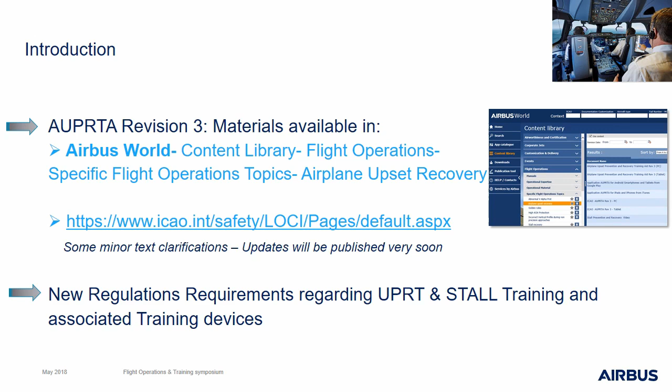What is the Airbus answer to all these things that we have in the regulation? First it was to introduce prevention of an upset, so that pilots can recover from this situation even if they are startled, and redefine what is an aircraft undesired state towards a stall. We were complying with this basically just by having this revision 3 document, but we said this is not enough. So let me come back and refresh our mind.

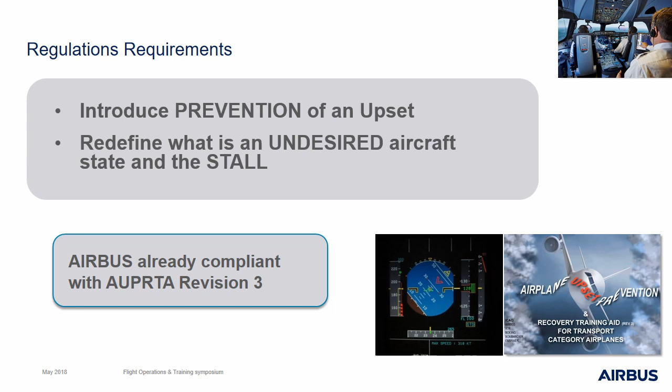What is an undesired aircraft state? As you know, it's not based anymore on bank angle or pitch attitude and so on. It's really that the aircraft starts an unintentional divergence from parameters normally expected during the operation. This could be pitch and bank divergences, but also speed. You can have moments in your flight where the speed is decreasing without you ordering it. So this is basically an upset of the aircraft, an undesired aircraft state.

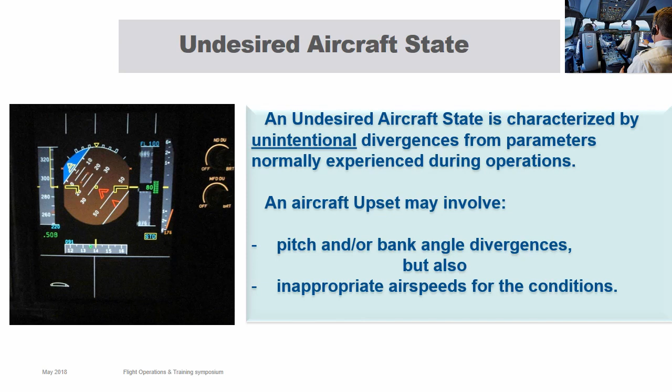The regulation now came out. We had regulation in the EASA and in the FAA. We did communication towards our customers. I will come back later on what we have done. And basically to the trainers, we had to explain as well why we need this new training, and we provide them with training recommendations, what is the best practice in order to complete this training on upset recovery.

On my slides, you will see two icons, sometimes one on the top right corner. One will be a cockpit, meaning this slide is dedicated to flight crew. And if you see a simulator, this means that this slide is dedicated to training devices.

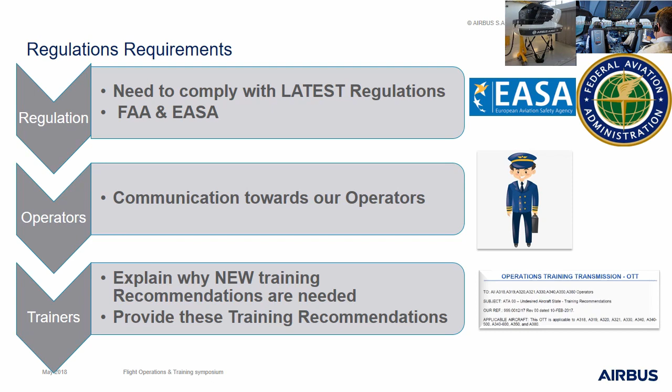Regulation-wise, we have EASA and FAA, and we have two parts. One part is for the aircrew, so for the pilots, and the other one is linked to the FSTDs, or the full flight simulators. In the FAA part, we have regulations in Part 121, and in EASA we have Part FCL, UPRT, and stall training. For the training devices, we have regulation in FAA called Part 60 with Change 2, where they impose more things that your simulator must be able to do. Very recently, EASA came out with a CS on FSTD, Issue 2 as well, with full capability of the stall training.

Based on all this information that we have reviewed, we have seen the need in Airbus that we have to issue a new data package, not only for the full flight simulator, but as well for the flight crews.

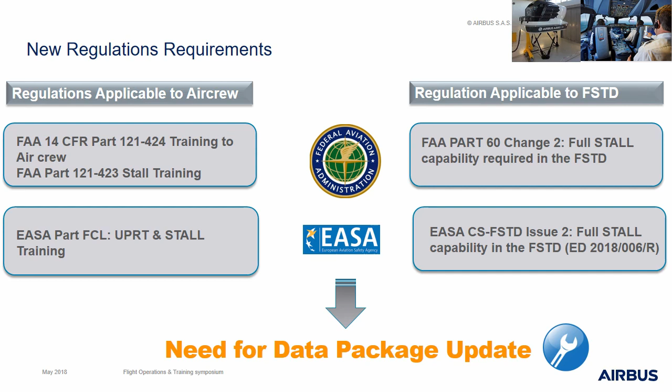For the full flight simulators, the FAA Part change 2, if you follow the FAA regulation, you have to comply with this. It requires that your FSTD must be able to do upset recovery training and stall training. The regulation has been published in March 2016. And if you do upset recovery training with your device, you have to do this before 12 March 2019. From that day on, all your training devices in which you perform upset recovery training or stall training must comply with FAA Part 60 Change 2.

On the EASA side, as well, we have an FSTD, CS-FSTD that came out, where full stall requirements must be available. But the regulation in Europe in EASA doesn't impose doing full stall training as compared to the FAA world. So it's up to the operator to decide to do full stall training. But EASA only said that you have to recover from the first indication of a stall. It has been published, the directive 2018-06, on the 3rd of May of this month. It's based on UPRT as well, stall training, and it's basically harmonized with the FAA. So we have two similar regulations now in the world.

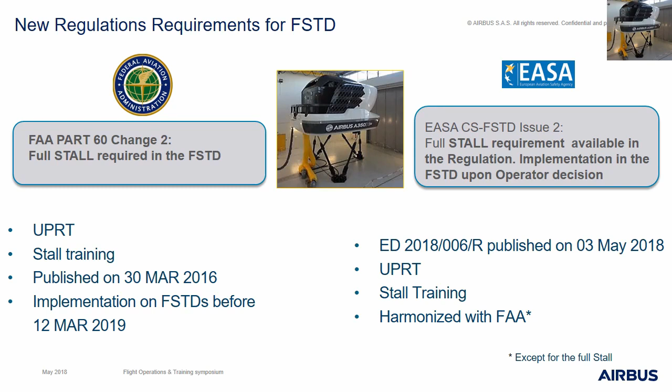And the Airbus answer for that is to have a fully compliant flight simulation training device. We introduce something new, what we call the automated stall entry function. I will come back later to this. This is something that we have developed, and we are sharing this with the simulator manufacturer in order to introduce

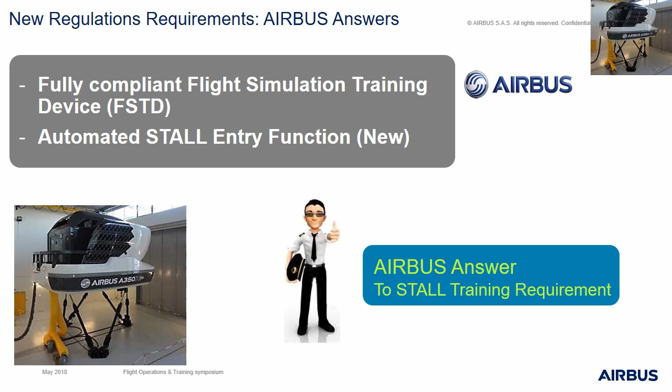On the FSTD and the automated stall entry, so what does Airbus deliver actually? We have a simulator data package that we provide to the simulator manufacturers. It's fully compliant with Part 60 Change 2. This means that you have a total free play capability, so you can enter a stall and fly the aircraft into the validated training envelope of the aircraft.

Remember that in a full flight simulator, you have different envelopes. You have the envelope where we went into flight test, which is completely validated. A little bit bigger envelope in which you can fly is the engineering data, so we extrapolate some of the data that we have encountered in flight test, but the aircraft can fly there. And then we have a validated training envelope.

This means that the simulator can fly within an envelope, and if you pass this envelope, the simulation will freeze. As an example, if we do stalls with an aircraft in flight test, depending on the configuration and so on, we go to 16, 17 degrees angle of attack. By engineering, we can say we can go up to 20, 21, but the full flight simulator can go up to 30 degrees angle of attack. But we don't know if it's really completely representative.

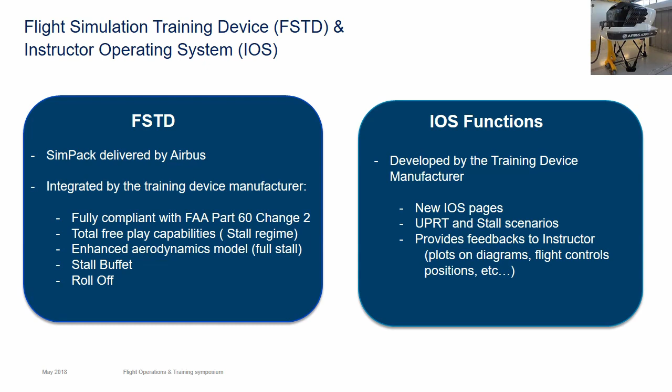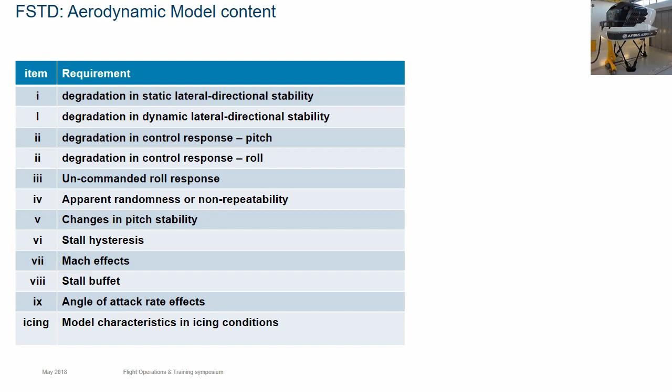To come to the aerodynamic model that you need to have for the complete stall and to be compliant with the regulation, FAA or EASA, these are all the points that you have. Basically, in the first model that we have provided, that our Department of Simulation Data is giving to your simulator manufacturer, we had all those points which were already in.

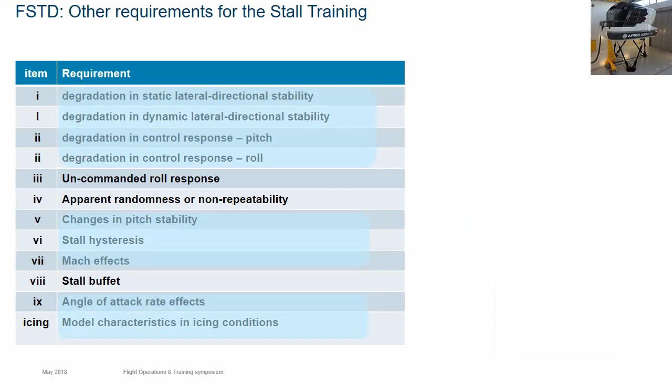Now, the points which were not in are the uncommanded roll response and apparent randomness or non-repeatability. This means that we have to introduce wing drops in the stalls and the stall buffet model. If you have all this in your model, you're fully compliant with the regulation.

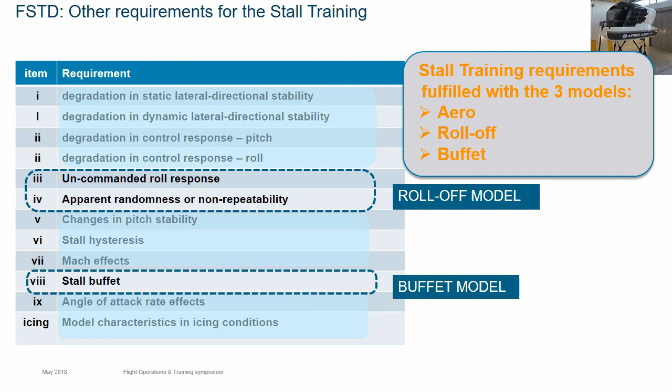To give you some more detail on the roll-off model: we went into our database of flight test and looked at the hundreds of stalls that has been done during the flight testing of an aircraft. We looked at how much time we had a wing drop, and we decided to recreate this roll-off model in our simulators.

First, we did it in our engineering simulator with the right computers, the PRIMs and the SECs that we have. And then we generated this model in the data package, and we tuned this in the full flight simulator.

We have seen sometimes in the world that some simulator manufacturers or providers of stall devices in the full flight simulator were really not realistic. You can ask even Wolfgang - basically most of the stalls that we have, our aircraft will remain wings level.

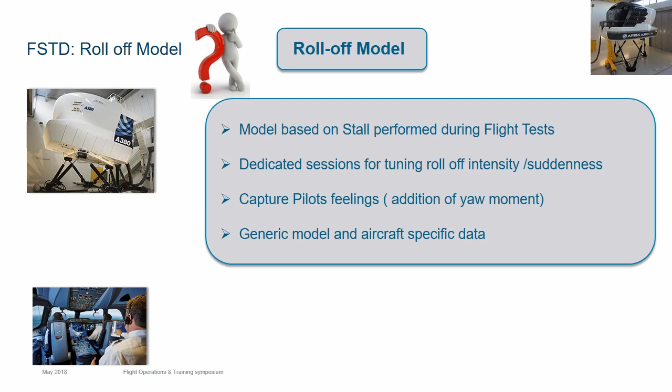We didn't want to introduce scary situations with very big wing drops in the training devices, so we wanted the exact reproduction of the aircraft. One of the key things we had to do during tuning in a full flight simulator is introduce a kind of yaw acceleration in the motion movement in order to correctly simulate the wing drop in the aircraft. So this has been done.

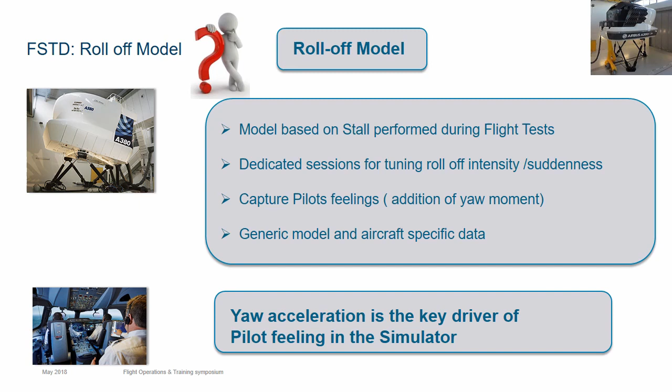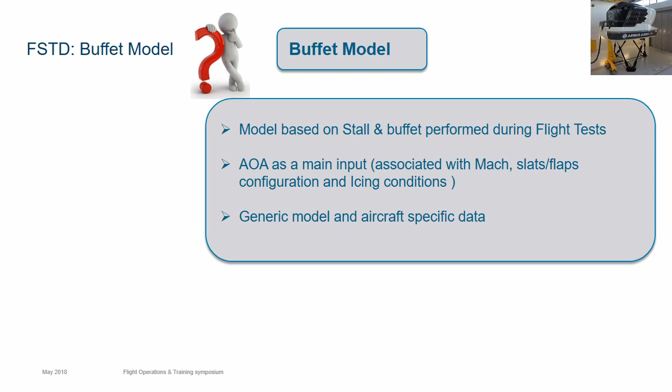For the buffet model, it's again based on stalls performed during flight test. The main driver to induce this buffet is the angle of attack. Of course, the buffet is also a function of the Mach effect, the configuration of the aircraft, and so on. This model gives a realistic input into the motion.

We had sometimes complaints that this kind of motion movement could damage some parts of the simulator. We have seen simulators where parts of the ceiling were coming down, but this is really the real buffet model.

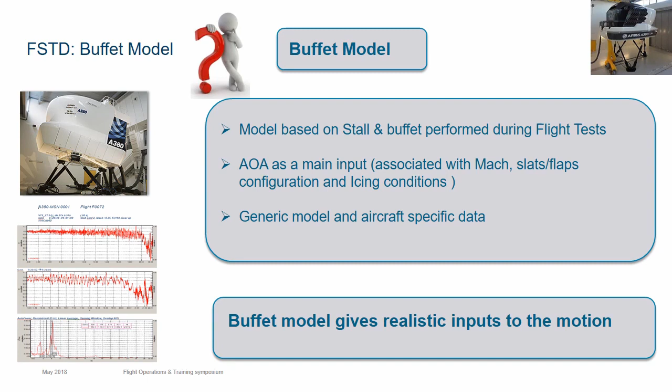What we did is shown in the different graphs here, where we have what we did in flight test shown by the magenta line, and the dotted magenta line gives the reproduction in the full flight simulator.

On the lower two parts, we worked on two important pieces of information as well for sensation in the pilot seat, which are the vertical vibration and the lateral vibrations. So we put accelerometers on the pilot seat in the full flight simulator, and we compared this because during stalls that we do in the aircraft, we have accelerometers on the pilot seat. We compared those two models.

We went to the simulator manufacturer in order to tune this and put it really into a data package. So with the fully validated data package that we provide, you have exactly the way the aircraft behaves, and you can show those symptoms to your trainees.

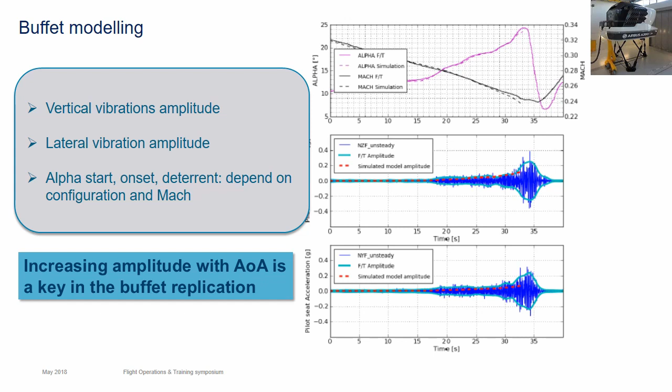This is for the aerodynamic model. For the functions for the instructor, we have sent a document to the simulator manufacturers, with recommendations for some pages in the instructor station, and some scenarios for upset recovery and stall scenario activation -- what I just said before, the automated stall entry.

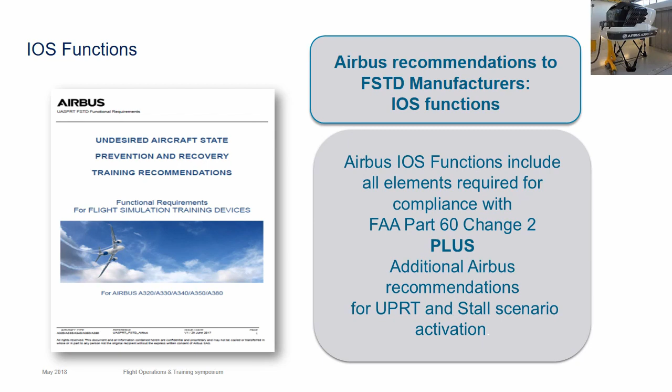This is typical for an A350 simulator that we have in Toulouse -- more of a prototype. One page you have to provide to the trainee is what we call the alpha-beta plot. This means the angle of attack and the side slip during an exercise, where you see the limits -- where you're going to have the stall warning, where you have the critical angle of attack, where you have the full stall situation -- so you really see how the aircraft behaves and how the recovery training has been done.

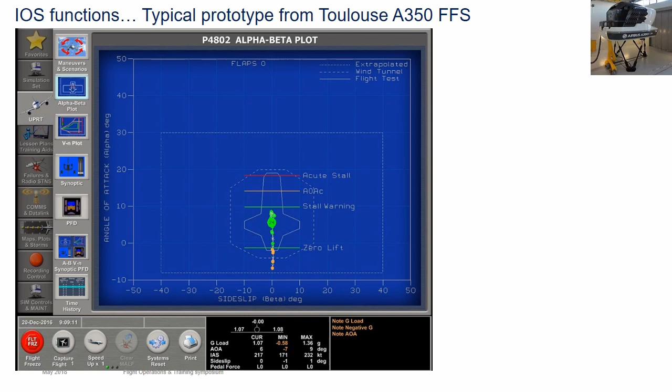The second page you must have in your simulator to correctly do upset recovery training is what we call the load factor and speed plot. This is the flight envelope of the aircraft, where you have 2.5 G positive and up to -1 G negative. You see how the trainee recovers. If you see him going all over the place on the page, this means the recovery technique was not correctly done, and you have to repeat this until he's proficient in the recovery of the aircraft.

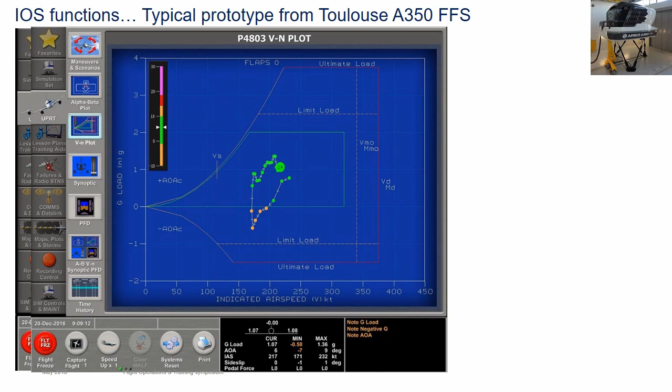A third page which is available is a kind of plot, second by second, where you see all the different parameters of the aircraft.

The fourth page we have is a summary of all the pages, where you have a picture of the primary flight display and the position of the flight controls during recovery. If you do recovery, it's not easy as an instructor to see what the pilot is doing with the side stick or with the rudders. So from that page, as instructor, you can clearly monitor how the recovery is done.

Of course, all of this can be recorded and replayed in the briefing station, or in real time if needed in the full flight simulator.

The last page we have is basically the maneuvers and the scenarios. We have two parts here. One is what we call maneuver-based training -- this means we will introduce the aircraft into an upset.

Could be nose high, nose low, high speed, low speed, with bank, without bank. The simulator will be frozen at that position. This is used basically to teach and to recognize upsets, so that everything is frozen and you explain to the trainee, or he has to discover in which state the aircraft is.

The issue with this kind of simulation is that at the moment you release the full flight, because the situation is frozen, the motion is not kicking in at the same moment. So if you do recovery from that position, the time that the motion is coming in could give negative reactions to the pilot, or do negative training. This is why we recommend for big upset recovery training to disconnect the motion, not to use the full flight motion.

The right-hand part of the screen, we have scenario-based training. This means that you can induce, without the pilot knowing it, so a startle effect, some changes in the aircraft behavior. You can do that with light, moderate, or severe effects.

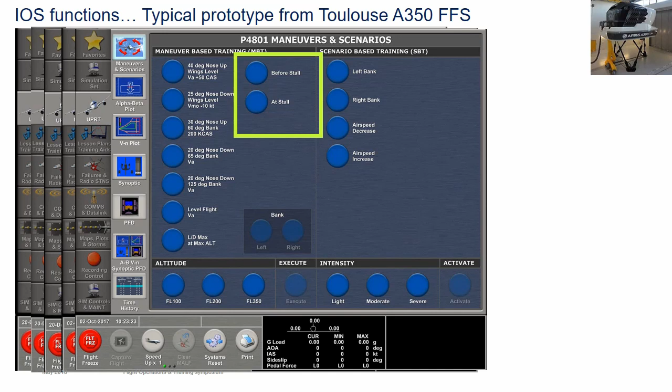Then in the middle we have introduced two new functions. They are called now before stall or at the stall - the name can change. This is basically to answer the requirements of the FAA on Part 121, which would require full stall training. This means the pilot has to go beyond the stall warning until the aircraft is stalled and recover from that position. Is this easy to do? Do you think? No, it's not easy to do.

First thing, do you know when the aircraft is really stalled when you're in a full flight simulator? Not easy to define. Even for us at flight test, when we do stall training and stalling of the aircraft, we have a flight test engineer in the back who is yelling to say that the aircraft is stalled, because we don't feel it in the cockpit. He can see on the instruments in the back when the lift is disappearing and there is a kind of G-break, what we call, that the aircraft is coming down, to say look, there the aircraft is stalled.

Full flight simulator, very difficult to discover. And the second part, which is quite important as well, we want pilots to recover at the first indication of the stall. First indication of the stall could be the stall warning, or buffet, or other symptoms, wing drop or non-responsive flight controls. We don't want pilots that when they are into the stall, the stall warning is yelling there in front - stall, stall, stall, cling, cling, cling - that you say to your trainee, continue to pull the side stick in order to go to this full stall.

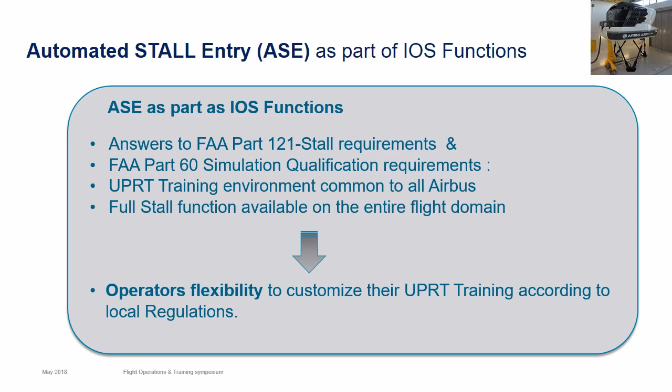This is why we came up with the idea of what we called the stall demonstrator. What is the stall demonstrator? We have two scenarios in there. The first one is a kind of what we call the stall demonstration.

This means hands off, you say to your trainees, imagine that somebody else is flying the aircraft, or you sit in front, and the aircraft will decelerate towards the stall. When the aircraft reaches the stall, the angle of attack stall, the aircraft will stay at that position, the motion will not freeze, and the aircraft will continue to fly at the stall position.

So this really is a device for teaching. At that point, you can say to your trainees, look, this is the pitch of the aircraft, this is the angle of attack - if you use the bird, the pitch minus the FPA gives you the angle of attack. Look what the vertical speed is doing. Feel the buffet that you have at that time in your seat. Try to remember this. Have your memories wakened up to remember those phenomena.

And when you're at that position, at any time you can say to the trainee, recover. This means the motion is alive in this position because it simulates the buffet. At the moment the pilot touches the side stick, he can do a full recovery from a stall situation. So this was our way to answer the FAA.

The FAA have given us feedback on that, and they said it's a very good starting point to do full stall training. In the future, we will still have discussion with the FAA in order to have this fully approved, or put somewhere in a document that this is really what they have to do. So this is the first part.

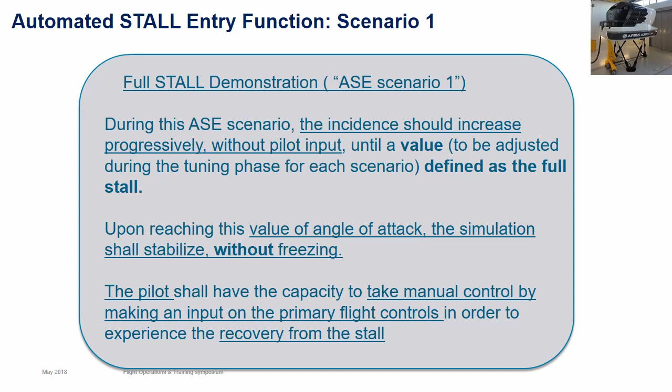The second part that we have is what we call the full stall exercise. This means that there as well you can stall the aircraft and introduce wing drops and so on. The idea in this exercise is that, imagine the other pilot is flying, the aircraft starts to decelerate, you're pilot monitoring, and as soon as you start feeling the buffet, you have to recover from that situation.

We have done this in such a way that we went up to the stall angle of attack plus a few degrees. So if it's stalling at 6 degrees, imagine we went up in the simulation to 9 degrees. If you reach 9 degrees, the simulation will stop. This means you went too far and missed a lot of cues in recovering from that situation.

You can do the same by introducing wing drops, so roll-off models during this training, and you can see if the pilot has the good competencies to recover from this stall situation, which is what? First, reduce the angle of attack, so push on the side stick or release the side stick.

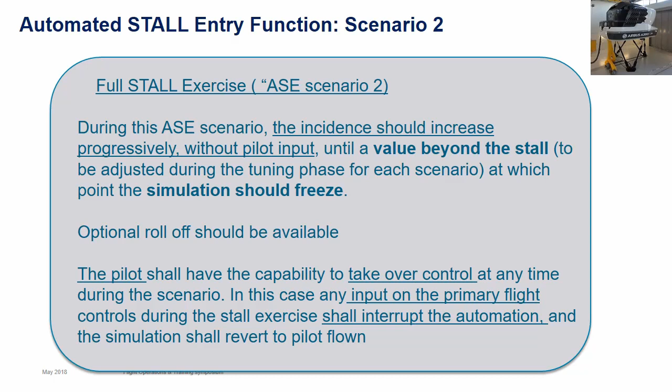So in a nutshell, to summarize, if we look at the stall, we have two positions. Either we stay and simulate the stall at the stall angle of attack by keeping the motion on, or we go to a point a little further where you have to recover.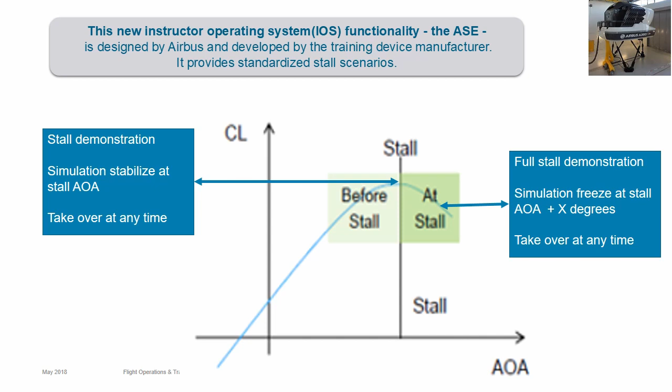So this data package is available from some simulator manufacturers, and we continue to validate this, because in order to have this, we have to provide you with a statement of compliance. Either you do it yourself or other people can do it. What is the statement of compliance for FAA Part 60 Change 2 or EASA?

You need the three models: the aerodynamic one, the roll-off, and the buffet. You have to be compliant with the QTGs, Qualification Test Guides. You have to have the correct simulated envelopes. And it's stated in the document that the statement of compliance includes a final subject matter expert assessment.

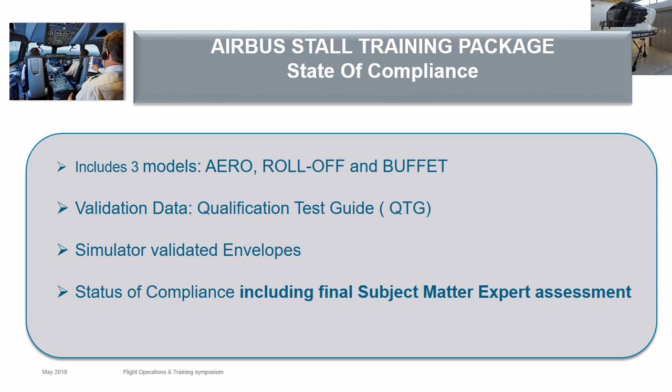We went into the regulation to see what defines a subject matter expert in stall. Everybody can say I'm a subject matter expert in that. What does the regulation say about the subject matter expert? The friend of Dominique Himeta, Chuck Yeager.

The guy has to be type-rated and qualified in the aeroplane that is simulated. So you cannot ask a guy from company B to validate the stall of company A's aircraft. Second, he must have direct experience in conducting stall maneuvers. So you don't find this person at every corner of a street.

The subject matter expert can have credit for different aircraft models. This means if you're familiar, within the Airbus family, with stalling of the A330 and you want to do the A340, you can have credit for that. And the subject matter expert must be familiar with the stall training maneuvers that will be done later on in the FSTDs. So the person who validates your stall model in the simulator must have real knowledge of stalling in order to give a statement that what is simulated is realistic, basically the aircraft.

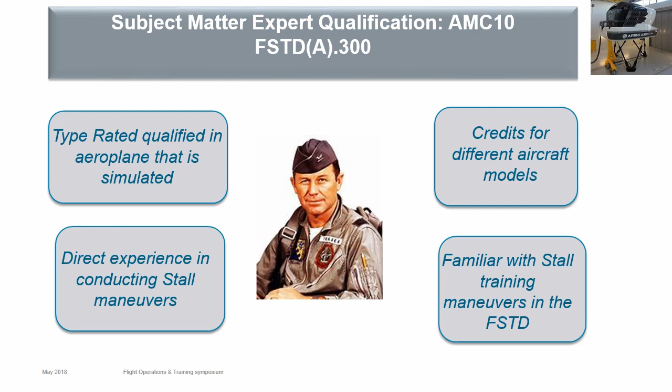Do we have those models in our data package? Yes. So for the A320 family, I have the standards there. The 2.0 is fully compliant. We have for the A330 CEO the standard 2.6.

The A330 NEO, since we are still stalling the aircraft and doing some testing with it, this will come later in the standard data package. We have it for the A350. And for the A380, we don't have a full data package, but we have an add-on to the actual data package in order to have the compliance matrix with the regulation.

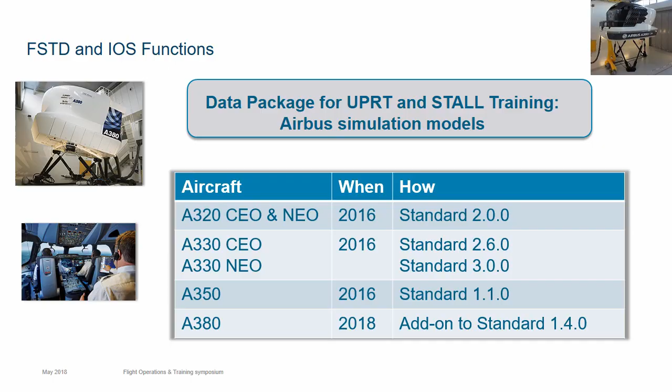So to summarize what we have for flight crew training: you have the Upset Recovery Training, revision 3. You have a lot of information on stall and upset in the FCTM. You have the stall training video, which is also available on the application that Maxime showed you. And you have documents from EASA, FAA, ICAO, IATA, and so on.

And of course, in our training organization, the ATO, Matthias will explain what kind of training program we have in order to fulfill the stall requirement from the regulation.

And of course in our simulator we have the full stall data package. You have the functions on the instructor station to complete this training, and the automated stall entry to demonstrate to your trainees the correct behavior of the aircraft during the stall.

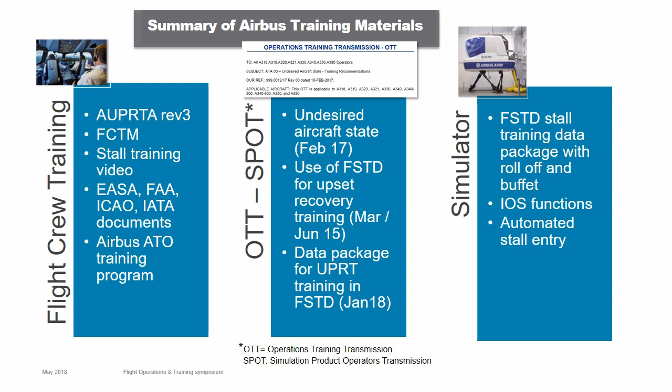Now I will let Matthias conclude with the training material and the training that we provide in our training organization.

Thanks, Gwyneth. Thanks, Xavier. Good afternoon, everyone. It's my pleasure to conclude on what Xavier just mentioned, what we have in the Airbus training organization available to support you as our customers.

I think we can do the link as well to what Florence presented just before. We will see that from a training organization point of view, for all that was presented, not only in terms of tools but also regulation, we have to develop a final product which we can offer to you. We have the same question internally, because we have to train our pilots and instructors as well, and I think that's a key point.

So basically the answer, and that's the conclusion of my presentation, is yes. As a training organization we have integrated all this in our type ratings. This is why, compared to our presentation at the symposium in Berlin about two years ago, as mentioned by Jean-Michel and Chris, we have integrated this in the type rating. The A320 and A330 type ratings were renewed last year.

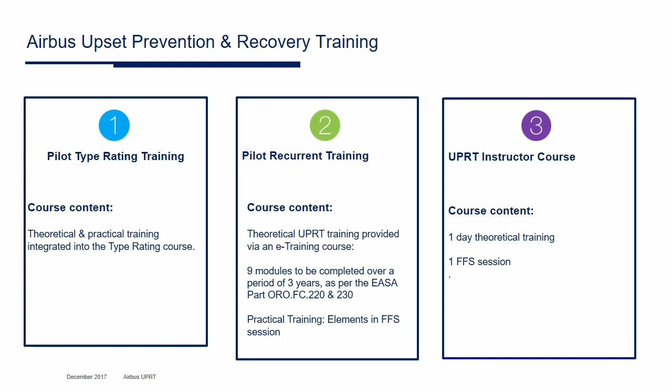So first of all, UPRT is integrated in the type rating training we offer today. We introduced it on the 320-330 by reworking the type rating course and on top implementing competency-based training. On the 340 and 380 we decided to have an additional full flight simulator session as part of the type rating course in order to tackle the UPRT training requirements.

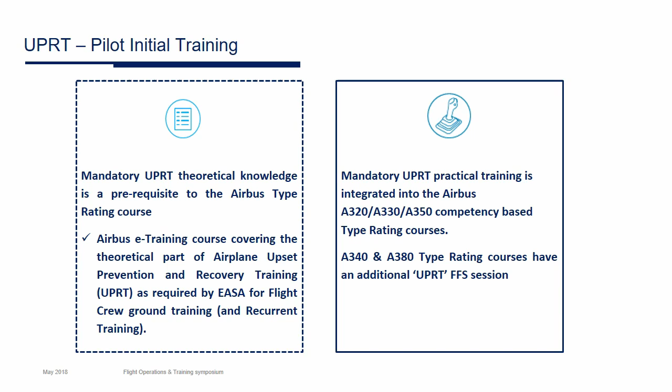Now for the recurrent training, we base it on a 3-year cycle. The theoretical part, as I mentioned, has 9 modules available via e-learning, and the exercises are integrated in our full flight syllabi. So the way we managed it is we have a standalone session to cover all the UPRT elements as a sort of gap-filler to what was already there in the 3-year training program, to ensure we are compliant with regulation as well as with our own recommendations to customers.

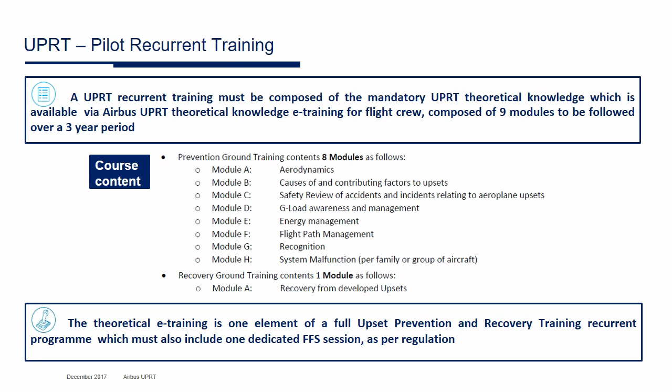And last but not least, on instructor training, we have a few prerequisites, because what we believe, and this is what Florence mentioned in her presentation, is that one way of experiencing fear is you do the training as an instructor, but before that you do it as a pilot. So you experience it yourself, and I think that was a key message shared today. This is why the instructor training we propose is based on the assumption that the instructor candidate will have already done UPRT training as a trainee, because it's not only about experiencing it yourself as an instructor, but understanding what it means to be training on these kinds of courses.

It's very specific, with key elements to tackle. And we heard a lot today: avoid negative training. For me this is a key message. Doing UPRT training and then scaring our pilots later on is not helpful. This is why we need to be very cautious with the guidelines we provide to our instructors, and make sure our instructors are competent to perform this very specific training.

On top, we learned from Chris about the 5 new instructor competencies as defined. Chris mentioned they are already being taken on board in Airbus development. One of the 5 was competency as a pilot. This is as well why we believe the instructor training can only be an add-on to a pilot who has already experienced UPRT training as a pilot.

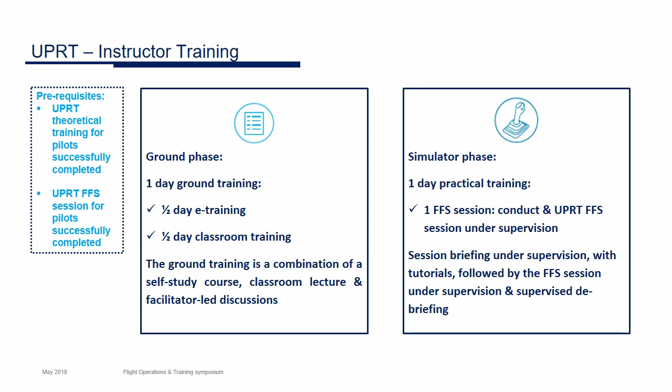So therefore, I'd like to give you a quick conclusion. What's our answer at Airbus? We have an answer to the regulation, both for the tools, as just explained by Xavier, and as well for the training organization and our training programs.

We have aircraft models updated in the simulator. We have the automated stall entry. We have our updated manuals and publications, including OTTs. And on the training side, we have updated our type ratings, the recurrent training and checking program, as well as the instructor training. Thank you.